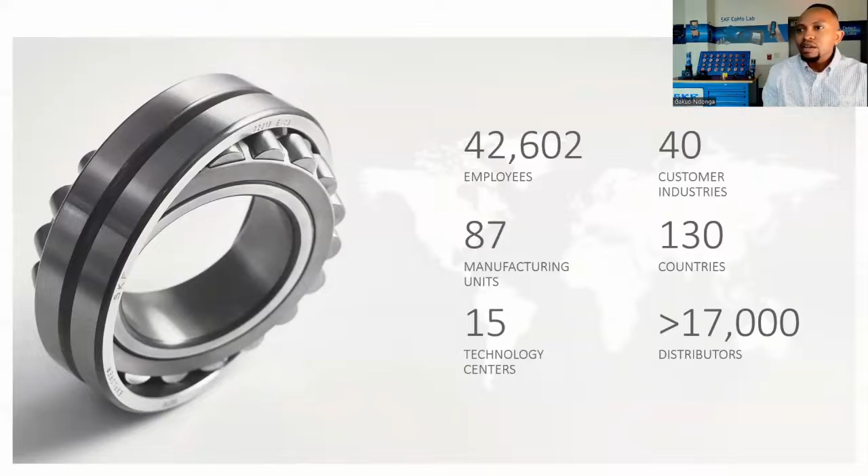If many of you are not familiar with SKF, it's actually headquartered where it was founded in 1907 in Gothenburg, Sweden. SKF has over 42,602 employees operating in over 130 countries with 87 manufacturing locations around the world. Now, many of you know SKF for bearings and bearing units, but SKF also does seals, industrial shaft seals, lubrication, primarily greases, condition monitoring, and services.

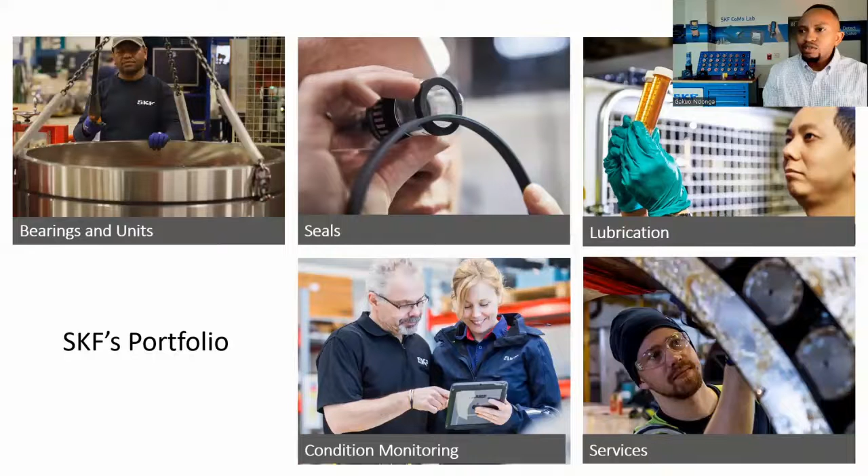So now that you know a little bit about my world and SKF's world, let's go ahead and talk about the selection process for rolling element bearings. Now, if you've ever gone through this exercise, you'll realize there's so many different designs. On screen, you have over 80 or more different bearing designs, but with all these choices comes many questions.

So what is the right design? What is the right size? How is that design going to perform? When is it going to fail? How can I prevent the failure? And then how much will it cost? These are all questions that come up and it can be difficult navigating.

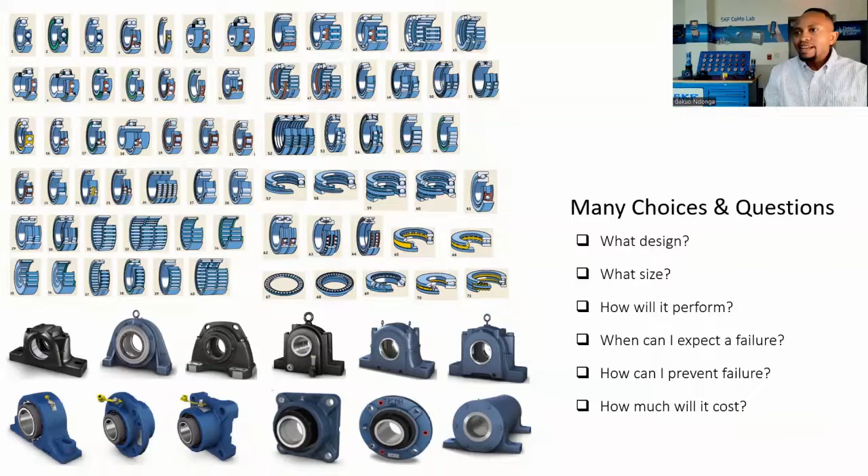And so what SKF has done is simplify this process to 9 key steps, which I'll walk you through, but they don't always have to go in sequence, okay?

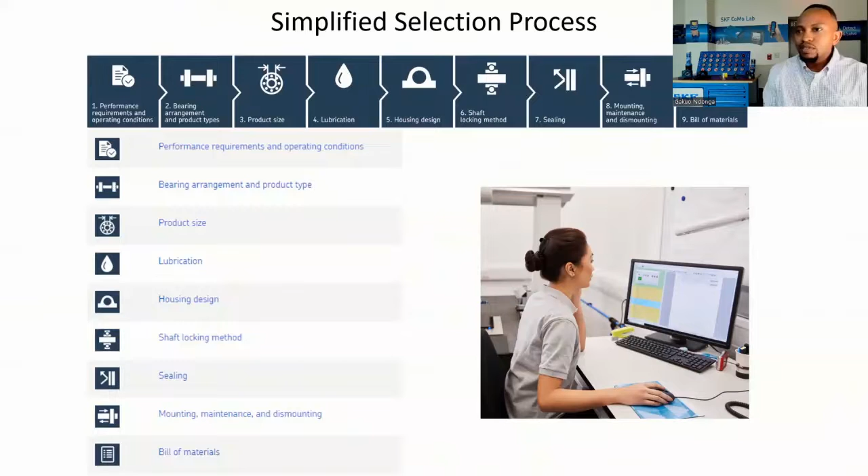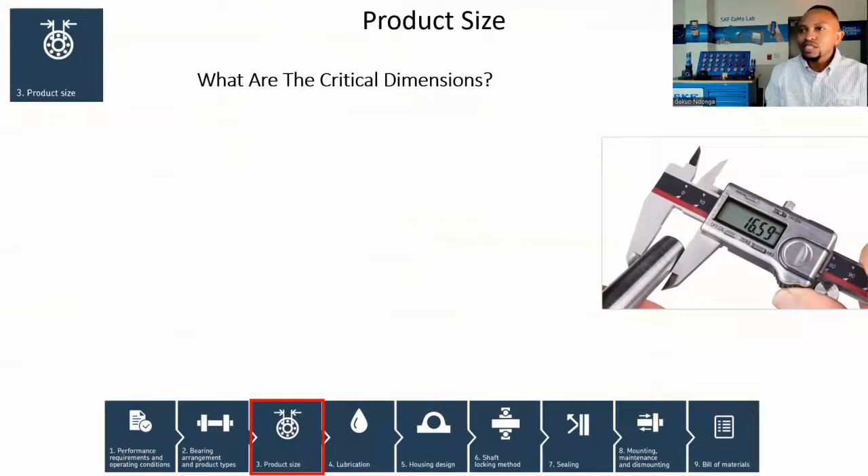So let's start by talking about size. So what are the critical dimensions? Many times when you're selecting a bearing, you have a size restriction, some boundary footprint to work in, okay? So a lot of times the critical design dimensions are, you have a shaft or a sleeve where the bearing is going to sit. That tends to be fixed or with a certain range. Similarly, on the housing side, you have a specific boundary. Width sometimes is a little bit more flexible, but those 3 dimensions are really what narrow down bearing selections.

Now, if you're dealing with a housed unit, sometimes dimensions like how high the shaft center line is, attachment bolt location, size, and any height restrictions are also valid.

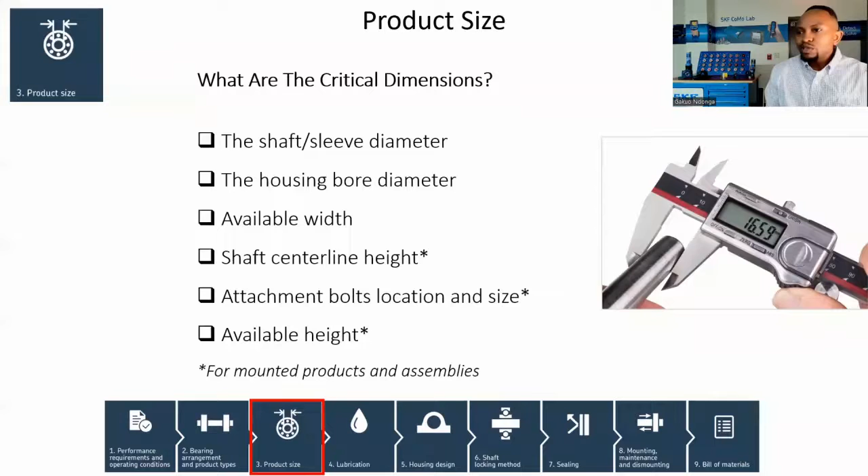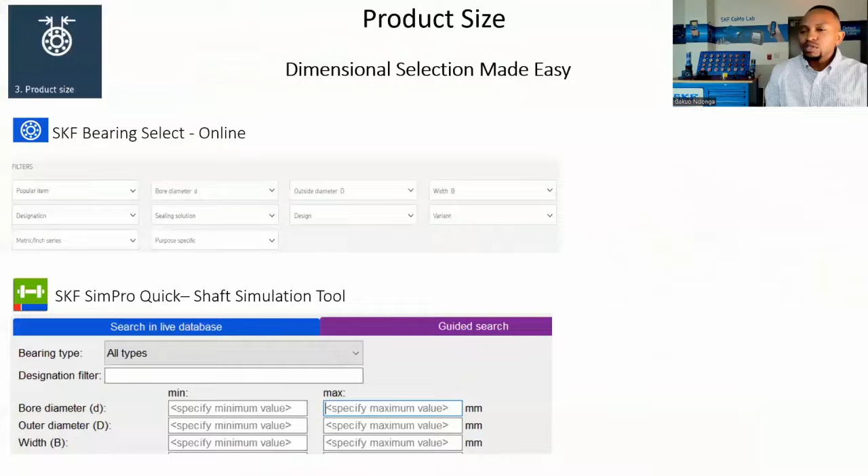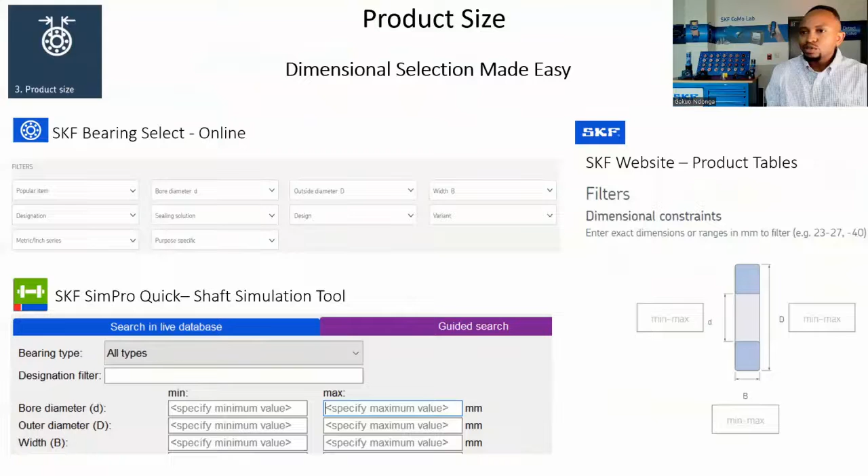So once you determine what your restrictions are, you can navigate our assortment easily. So we have tools online like Bearing Select, where if you have a specific range of diameters to deal with, you can sort through there. We also have our shaft simulation tool, which you can narrow down bearings based on those 3 dimensions as well. And similarly, our product tables are online. So we make it easy once you know those critical dimensions to sort through what designs can you actually use.

Now, the next step is understanding how is the bearing going to perform. Okay, what bearings do, they support load. Now there's different types of load. There's radial load, thrust loads, or also axial loads, sometimes moment loads.

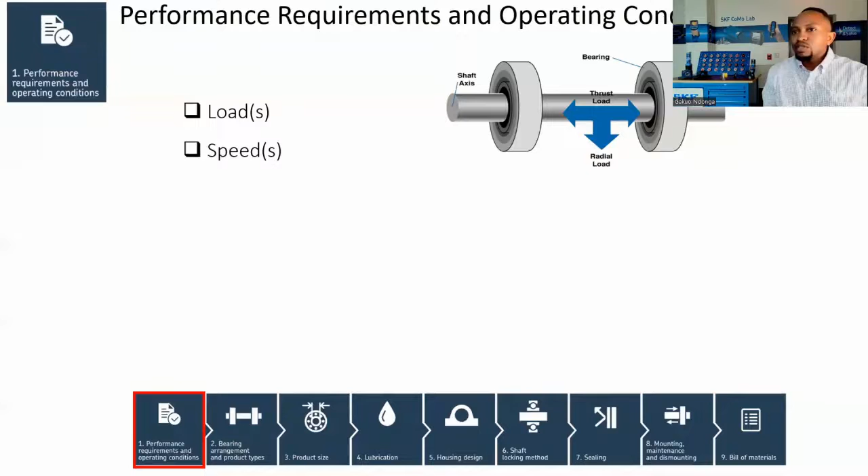So we need to pick the right bearing for that specific application. Some bearings are meant to do one thing, some bearings are meant to do multiple things in terms of load support. So we need to know what the application is going to require. Speeds, obviously the bearing is there to keep one component rotating, the other one stationary, but at what rate?

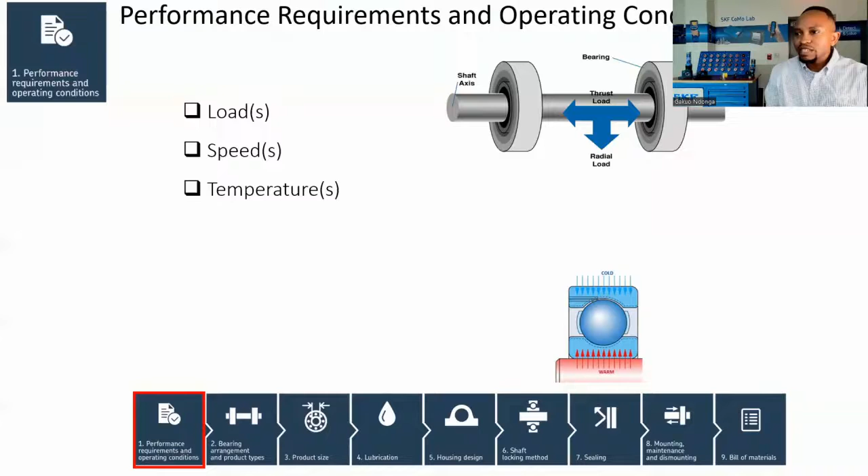So we need to know all the different speeds that are going to be part of the application. Temperature is also very important. That affects thermal expansion of the steels and also affects the performance of the lubricant. So we need to know all the full ranges that we're going to see. And what's actually commonly spoken about in terms of performance is fatigue life, or you also hear bearing rating life, or L10. That's a way for us to really evaluate based on the selection, the loads, speeds applied, what type of life are we expecting.

And certain equipment requires certain design of bearings, so it's important to know if you have a specific standard to follow. Similarly, industry standards for specific machinery will already dictate what design is supposed to be used. So a lot of this parameter is really required to really understand your selection. How is it going to perform?

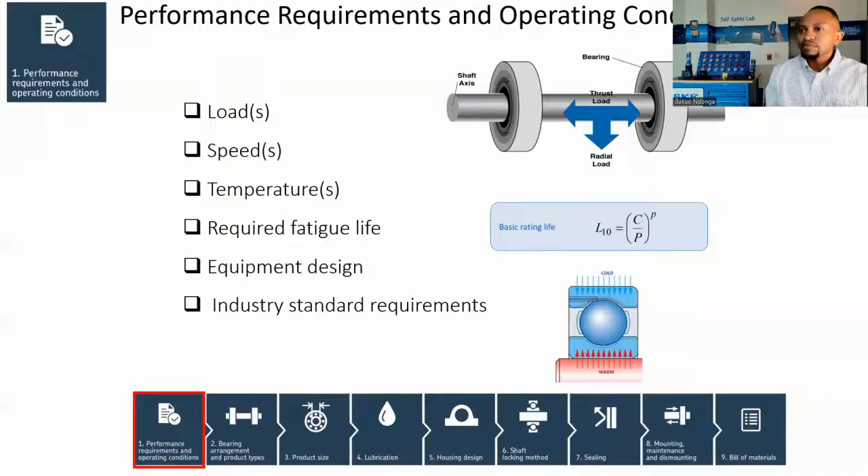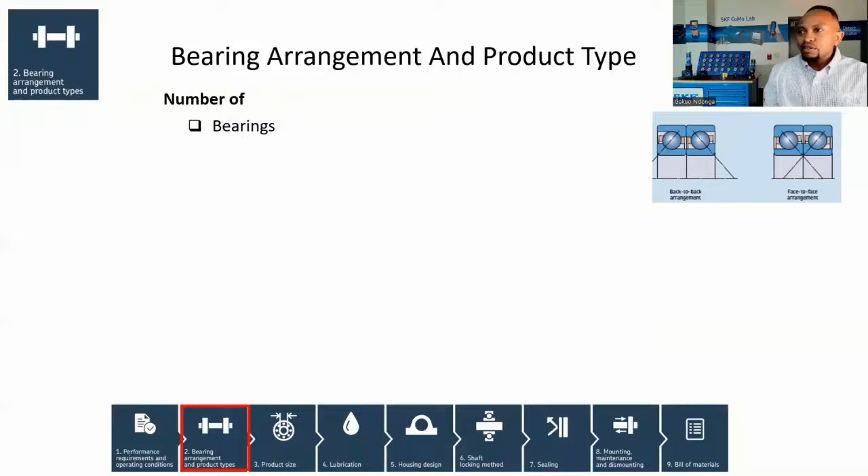Now, there's also arrangements to consider. Many times bearings aren't just used as a single item, they come in a specific arrangement. So sometimes there are cases where you have more than one bearing, as you can see on the image there on the right. This is a pair of single row angular contacts mounted together, but not in the same orientation.

Sometimes you have house assemblies that are used together, but for different functions. Here you have a belt-driven overhung centrifugal fan design, one bearing supporting one type of load, the other supporting another type of load. So it's important to know the number and what their purpose is.

Now, orientation is also important. You have horizontal and vertical being very common, and it's important because they may not function the same way. The loads won't be the same when you switch orientations. The performance of lubricant is not also going to be the same. So it's important to know how that's supposed to be oriented.

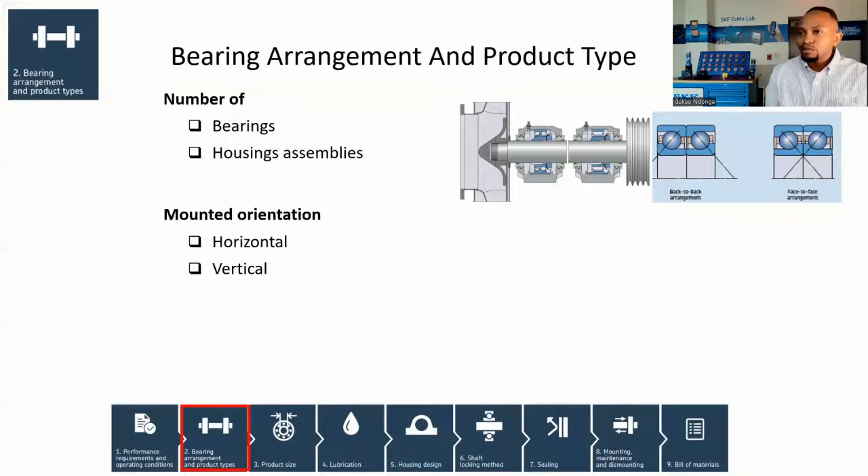And there's other features to consider. Depending on your housing design, it may have certain restrictions on what bearings you can use. For example, here we have an electric motor, and one bearing position requires it to be the locating, basically supporting the thrust load, while the other one is non-locating, which is allowing the shaft to actually either expand or displace. So it's really important to know what the function of the bearing will be when you're using more than one bearing.

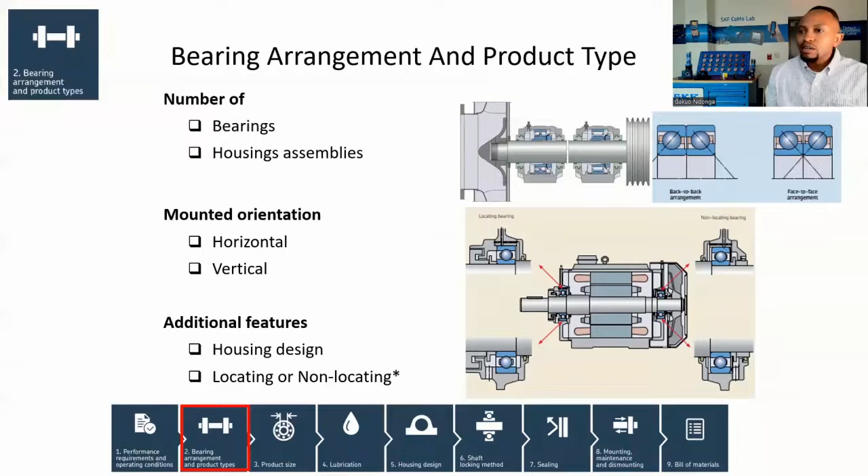The material is also important. Not every material is going to work in the same application correctly. Cast iron being very common, but we also see housings that are made out of stainless steel, some even ductile iron. So really understanding what is the right material for the application.

And you have environmental factors to consider. Do you need corrosion protection? In some cases, some housings are made of stainless steel or composite. And also lubrication, not every housing design can be used with oil. So knowing which housing is going with grease and oil is also important.

Two other points is what we just talked about in the last slide is load carrying ability based on the housing design. What loads does it support? And is there any specific requirements of the support surface? These are things that are really important to know before you select the right housing.

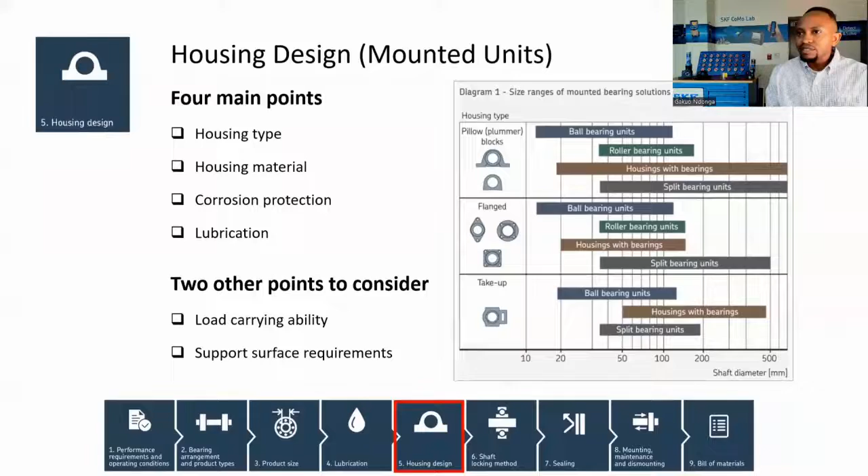Shaft locking method, there's numerous ones out there, but it's important to know what your application calls for. For example, very common is when you're dealing with a housed unit, like a ball bearing housed unit, you'll see set screw locking on the shaft, which is typically adequate, but sometimes you have maybe high loads or vibrations that may shake that set screw loose.

A lot of the factors that go into it are, for example, when you're dealing with tapered mounts, it can facilitate mounting and dismounting a little bit easier than going on a straight bore.

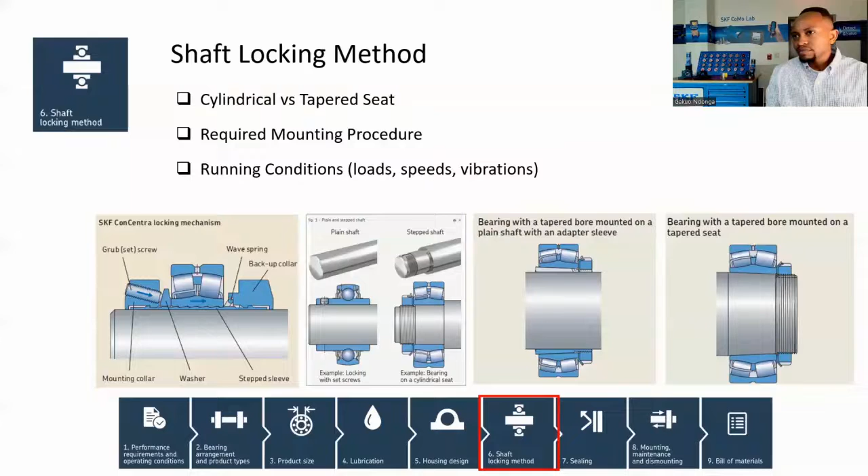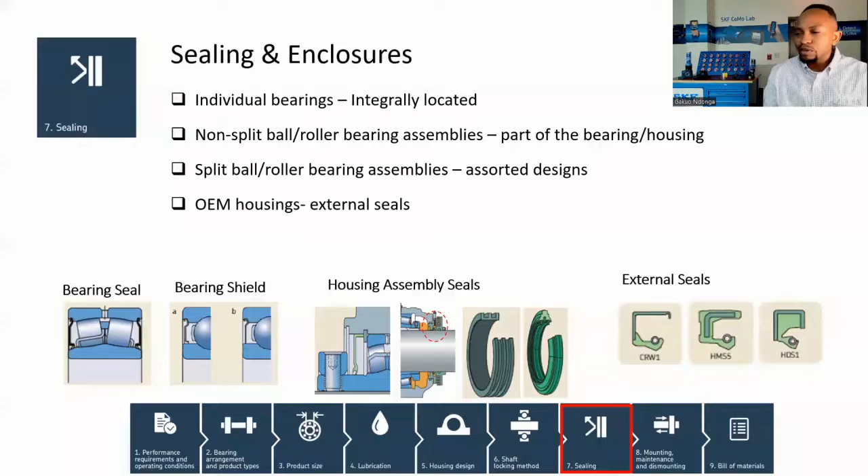Now, when you're dealing with non-housed units and maybe dealing with specific machine design, you will probably see more of these external seals that are outside of the bearing itself. And so you would run into some of those on the OEM designs.

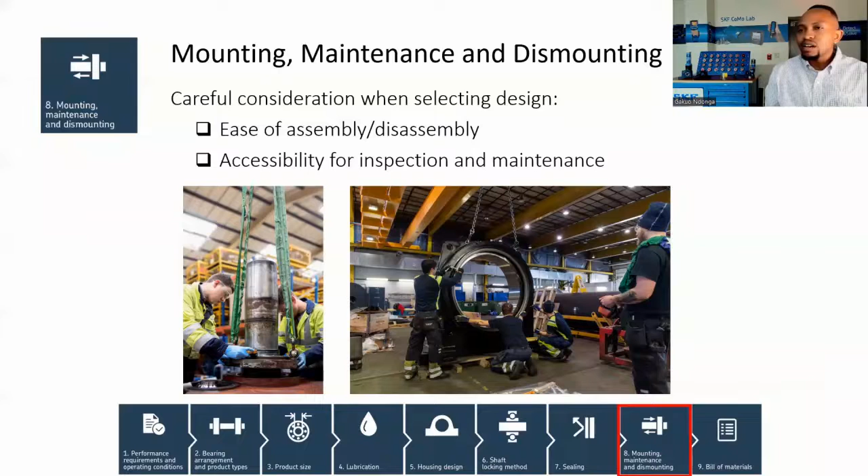When you select the bearing, you do need to consider the ease of assembly, disassembly. Because at some point, this machine or the bearing or the mounted unit will have to be assembled and disassembled. So you don't want to make it impossible to do that. In addition, once it's placed in operation, at some point, there's going to be some inspection or maintenance required. So making that process easy should go into your decisions on what is the right bearing to select.

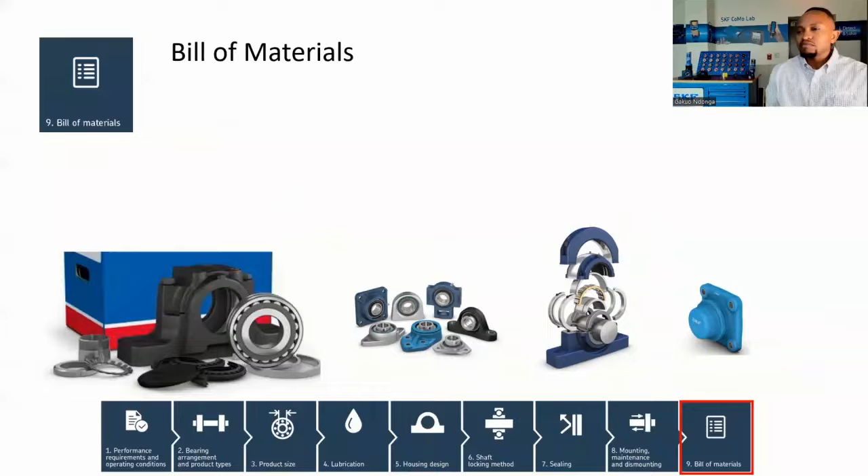Now, when you deal with housed units and assemblies, it can be important to keep track of everything because you're dealing with a lot of components. So, for one, variations can exist. So you need to know what are the internal design features required because those can vary.

In addition, the component quantities is also very important to keep track of. Some things come in multiples and are required in multiples, in some cases like locating rings, which fix the ability of the shaft or assembly to move axially. Those have to be inserted, installed in the right quantities, or the bearing will not perform as it's designed.

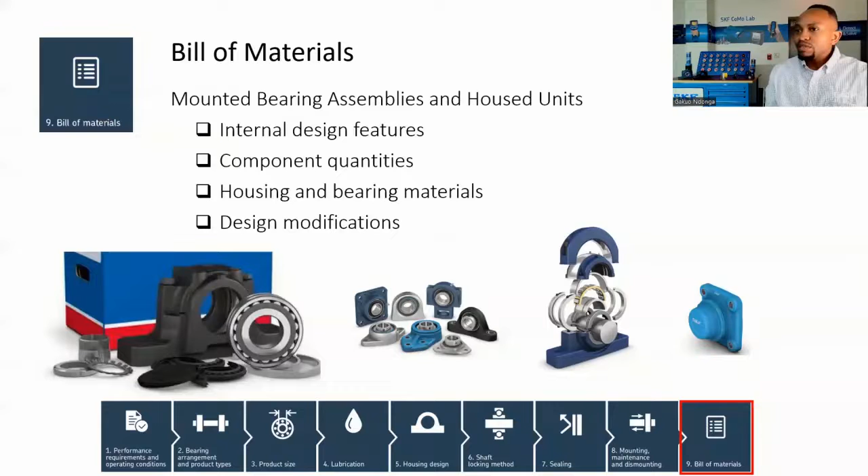As we mentioned, housings can come in different materials. In some cases, the bearing inserts themselves can come in materials. Keeping track of that is very important. And also design modifications, which is very common with split housings based on the applications. It could be condition monitoring, it could be seals, even materials modifications are made. It's important to keep track of what those are when going to select or even replace an existing assembly.

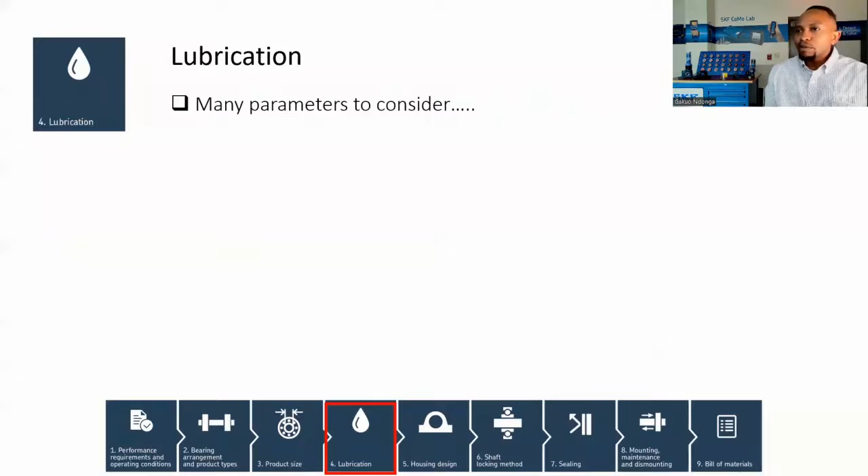So we've covered most of the selection criteria. The last one we're going to tackle is lubrication, and it's a big one. So we're going to actually look at all the parameters that go into lubrication selection. Now, many of you've probably heard, but a lot of bearing failures, 36%, are related to poor lubrication.

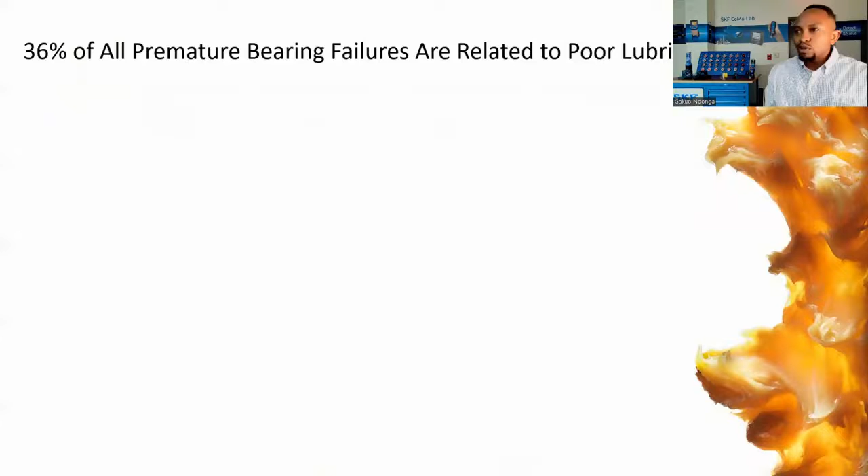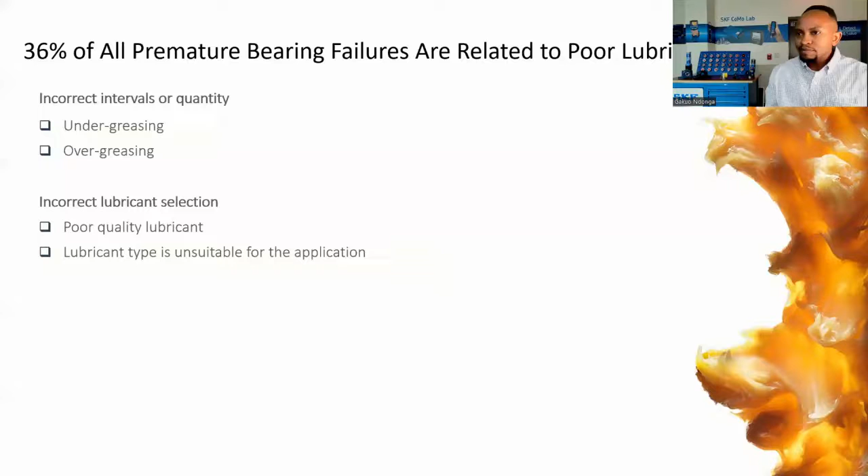And in what ways? Well, for one, incorrect intervals and quantity can lead to over or under greasing. The improper selection can lead to poor performance of the lubricant and poor performance of the bearing. And also environmental factors like contamination can reduce effectiveness of the lubrication and then also affect bearing performance.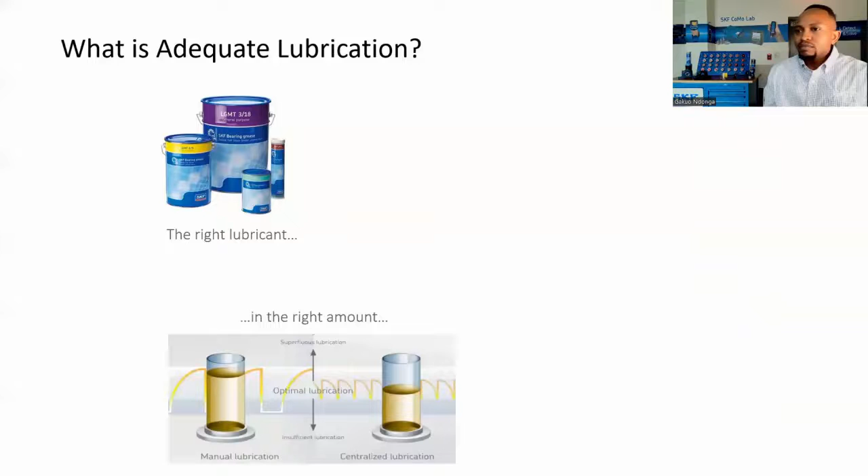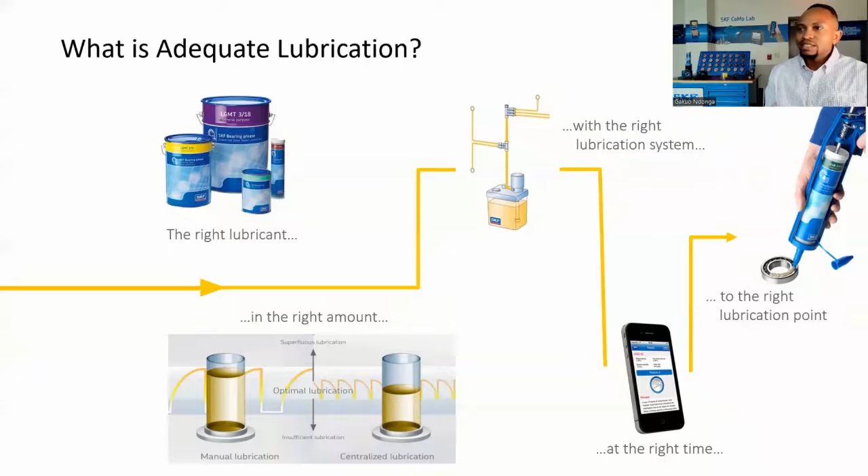So you may hear this term used a lot, adequate lubrication, but what is it? What we mean is we want the right lubricant, with the right amount, delivered with the right system, at the right time, to the right point of the bearing. When all of that is done properly, that's what adequate lubrication is.

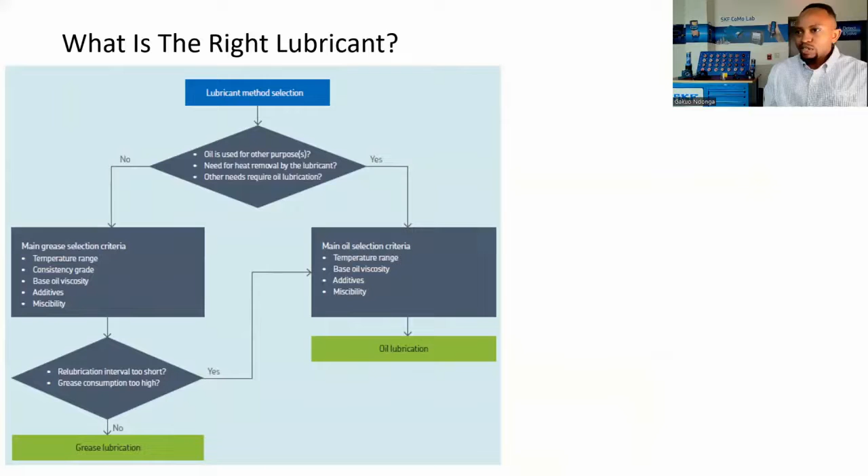So how do we decide what is the right lubricant? There's a decision-making process in selecting some of the most common lubricants, which is either oil or grease. These are factors to consider. Do you already have a lubricant in use in your design? For example, in a gearbox, you may have gear oil there. Can it be used to lubricate the bearings? In certain cases, you may have a spec that calls out the use of a specific oil. For example, automotive standards call out automotive oils. So that's something you may have to work with already.

In terms of the accessibility and maintainability of the machine, you may not be able to easily change the lubricant, or even monitor it. So that's something to consider when you're selecting oil or grease. Obviously, grease, once you place it in service, it's rare that you have to clean it out. You typically replenish it and keep what's there in operation. However, oil does require a little bit more inspection and maintenance. So these are things that will have to be considered. In addition, if you have high temperatures, heat removal, oil will probably do better because you can circulate it and it can take away heat better from the bearing.

In addition, you also may have contaminants in your environment. Grease may actually be an advantage because it can act as a barrier preventing contamination from reaching the contact surfaces—that goes along with sealing. So these are decisions that may skew you one way or the other when deciding oil versus grease, what viscosity levels, what consistency, whether there's a need for additives, and whether there's contamination. That's the general process in selecting the right lubricant.

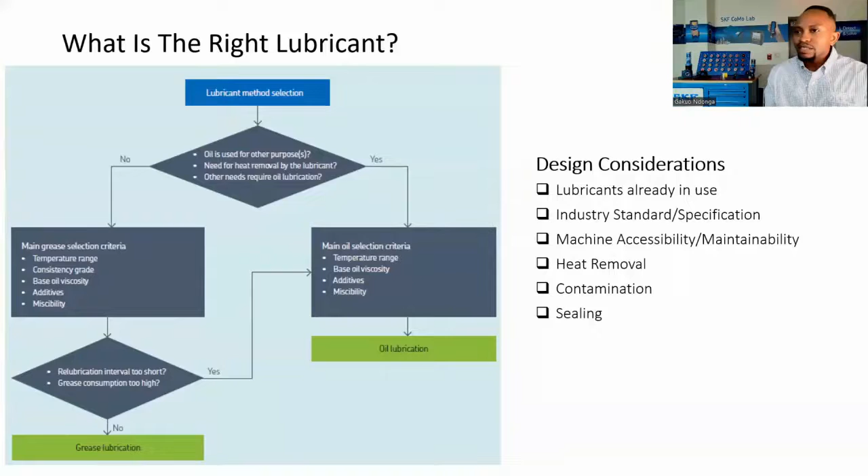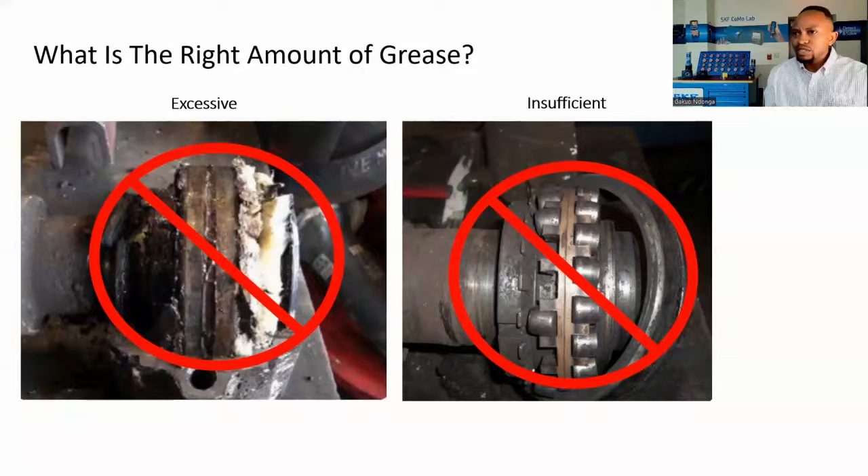So where do we want to be? The right amount of grease is somewhere in between. So what is that? When dealing with open bearings, first we'd like to fill the bearing with grease—very commonly, the standard is to fill the free volume 100% full. Now when dealing with sealed bearings or bearings with integral enclosures, like the spherical bearing we saw previously, it's common to see anywhere between 25 and 35% of the free volume filled. There are other applications that call for different percentages, and I'd leave that as application specific.

In terms of the housing, there is grease required. For most applications, 20–40% should meet those needs, because it needs grease to replenish itself once it's moved out of the bearing. As the bearing rotates, it picks up new grease in the housing, which acts as a reservoir. In areas of high contamination, the grease itself can act as a barrier, as mentioned—so if we fill that volume up to 70–80%, we can ensure better protection in contaminated environments, because it's harder for contaminant to penetrate through the grease.

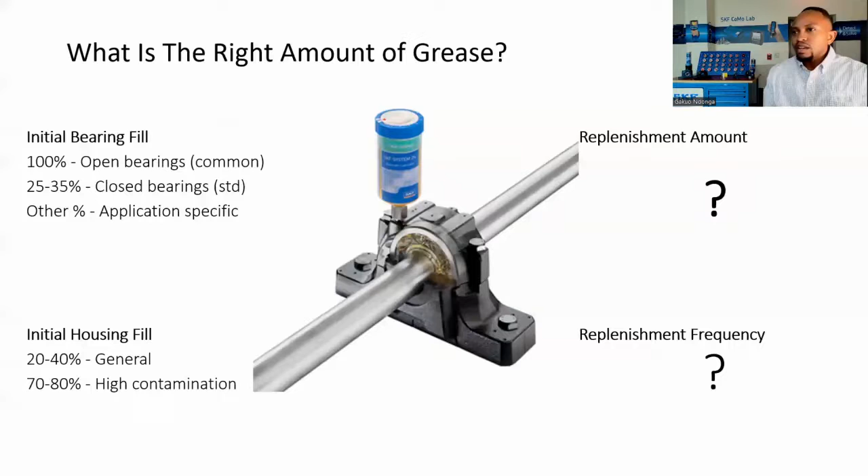But there are a lot of different oil applications out there—you have vertical circulating oil mist, for example. I'd lean toward following the OEM recommendations there, because there are a lot of parameters to consider.

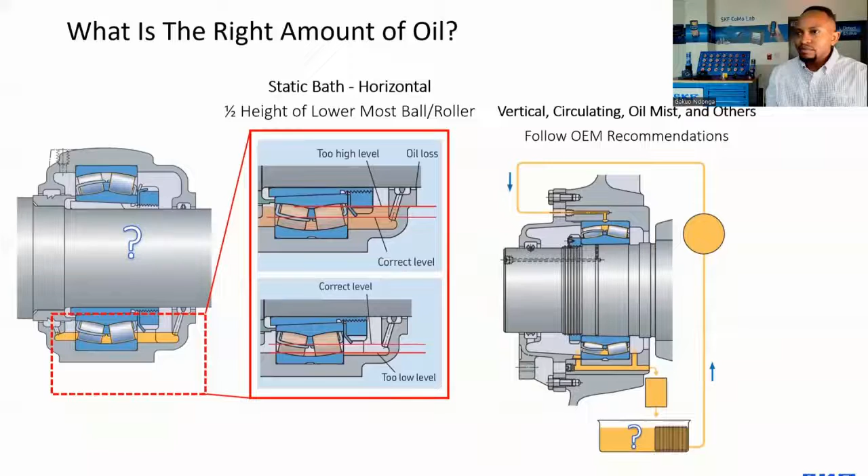So how do we deliver, or where is the right lubrication point? In most open bearings, the initial fill is typically done through the side, because that's the easiest way to access the free volume space in the bearing. Once you fill the initial fill, there's also replenishment after operation, and there are multiple ways this can be done. As you can see on the housed units, one goes through the top to the top center of a lubrication groove and holes on a spherical bearing, which relubricates symmetrically around the bearing—that's one way.

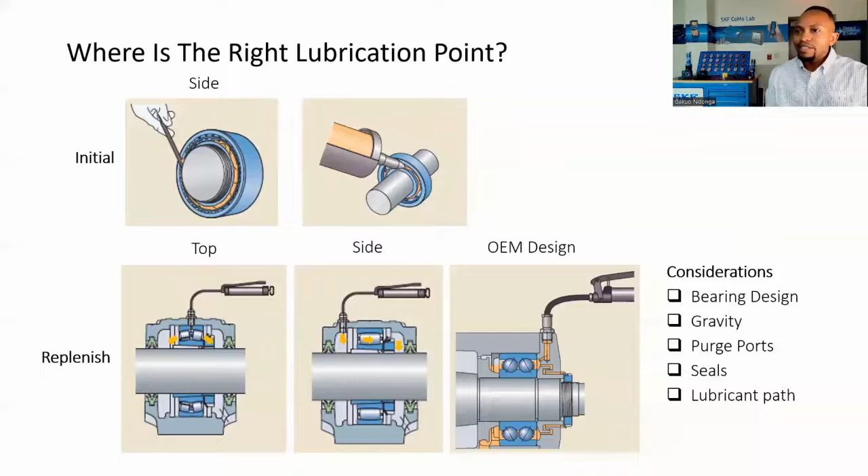So we have different methods of relubricating. Which one's the right one? Now, the answer to that question is any system that can deliver the right lubrication with the right amount to the right location in the bearing consistently is the right lubrication system. In most cases, that may be more than one system.

On the left, you have pretty much your most manual method, which is hand packing a bearing. However, when it comes to ensuring that you have, for example, the right amount of grams or a specific oil flow rate through each bearing consistently at a certain interval repeatedly, the manual hand packer method is not going to be superior to a centralized auto lubrication system. So really, obviously, any system that can be consistent is ideal. However, there's also a cost associated with going to an automated process.

So really the customer, the end user, has to decide. The automatic systems tend to be more consistent in lubricating, but is it fully needed? So really that's an evaluation for the end user or the OEM, as long as each system can deliver the right amount to the right location consistently.

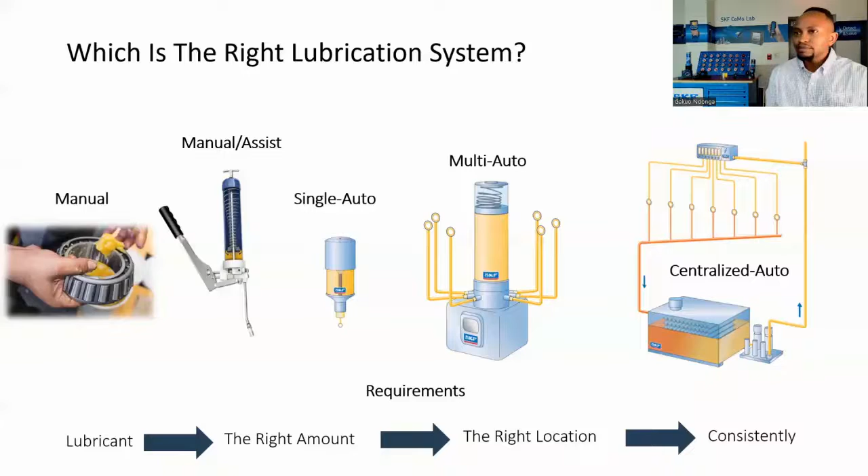So we've gone through all the 9 steps in the bearing selection process. We've talked about lubrication. In summary, for those who don't do this on a regular basis, we've broken this process down into 9 key steps. They don't always have to be followed in sequence. You may not have to go through all of them, but at least you have an understanding of what is required. After you do some of those steps, you still have to go through an evaluation like understanding bearing performance, and that requires use of literature like our catalog and our website tools.

Even after doing that, there's still a lot of information to navigate. So I always recommend, even after you've done all your due diligence, you can pick up the phone and talk to an application expert like myself and make sure you feel confident about your selection.